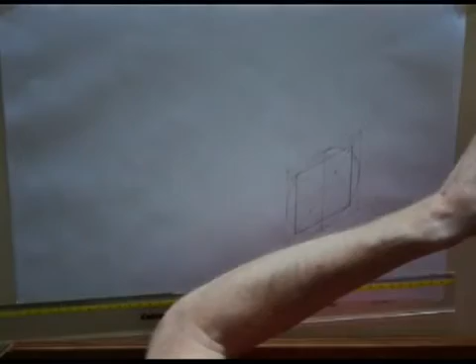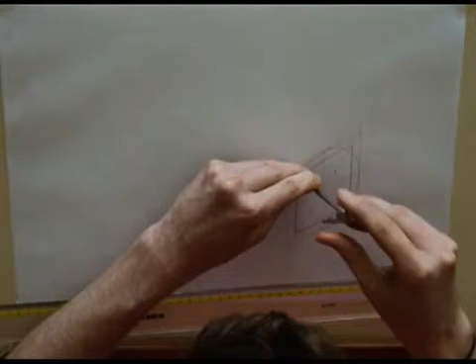So because I don't have to draw new lines now, I'm going to get my compass, place it on the bottom corner of this box here, and take it out to that side, and it matches the top there nicely. And to the top edge of that box. So you can see that my inside circle is starting to take form.

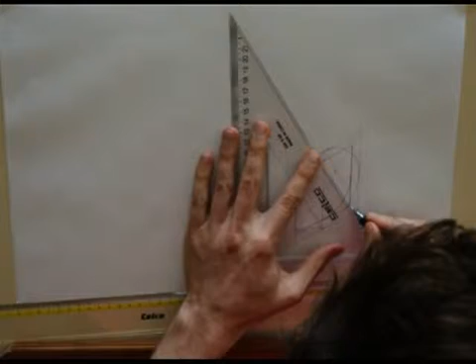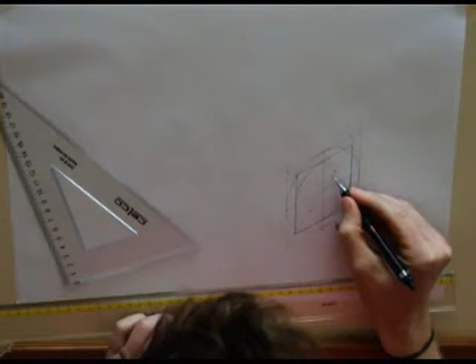Now this is where I do have to start to draw lines again. To find my centre point for the smaller of those arcs, remember we draw a line from the top of the box to the bottom corner. And from the bottom of the box to the top corner. And where those lines cross our longest diagonal line, that's where our centre points are going to be. So there and there.

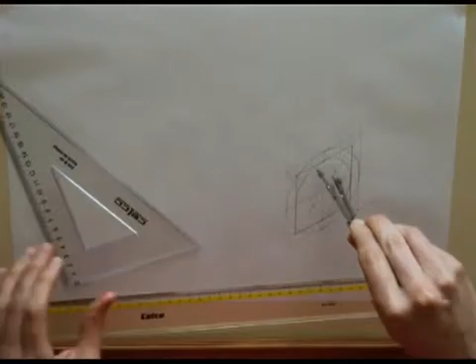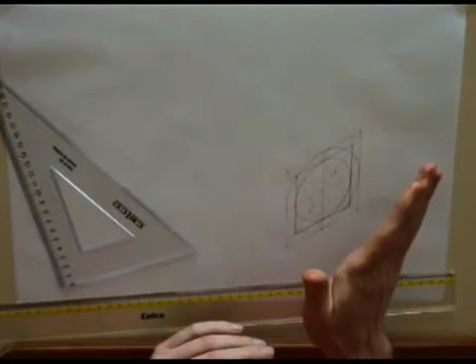Once again, adjusting my compass and checking that it hits both those edge points, which it does. I can scribe in the smaller of the arcs. And the same for this corner as well. Checking. If it doesn't quite match up, move your point around slightly. There you go. So now we have a circle inside a circle. So that's going to be one of the front faces of our cylinder. And the rest of our cylinder is going to come back this way.

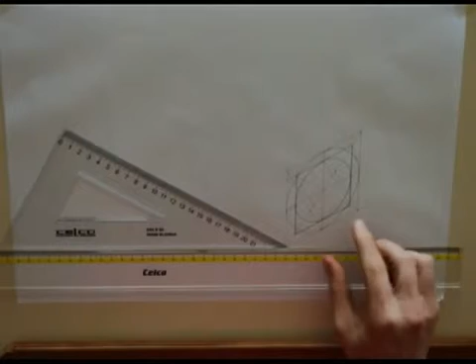So I mentioned crates before. A crate is essentially a box that fits exactly around the shape that you're going to be drawing. And crates are useful for helping us to figure out whereabouts things go on the page. And so our cylinder is going to fit exactly into a crate that's made of the larger of these two squares, these isometric squares that I've drawn here, and extended back as far as that cylinder is going to go.

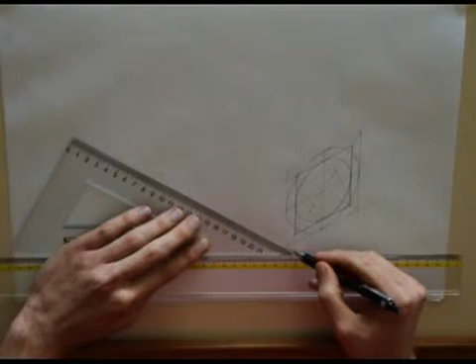So I'm going to make this cylinder 120 millimeters long. So what I first need to do is draw some lines at 30 degrees back from each of the corners of this square. And I'm going to measure 120 for each one and make a small mark.

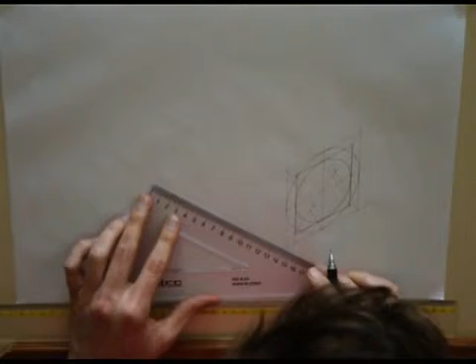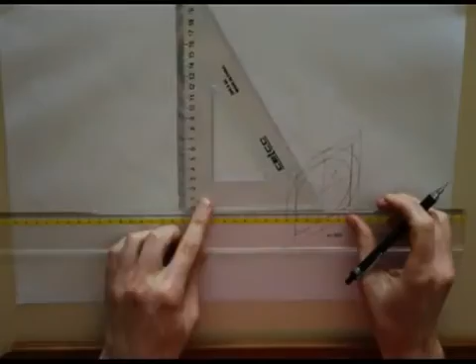And if you've done this accurately, those two marks should be exactly vertical, and those two marks should be at 30 degrees from each other. So let's see how well I've done. Looks pretty good to me. So this crate that I've drawn now, this shape here, this kind of box, that's the box that the cylinder is going to fit inside.

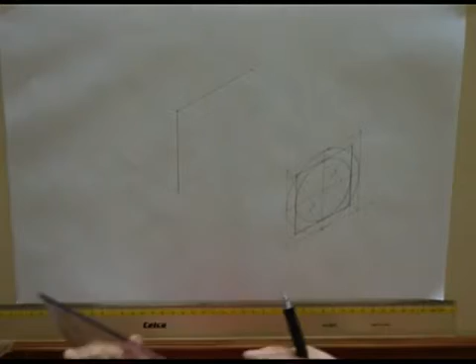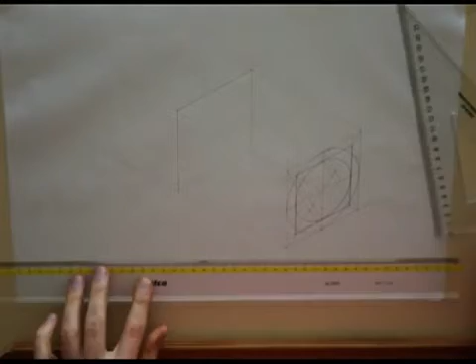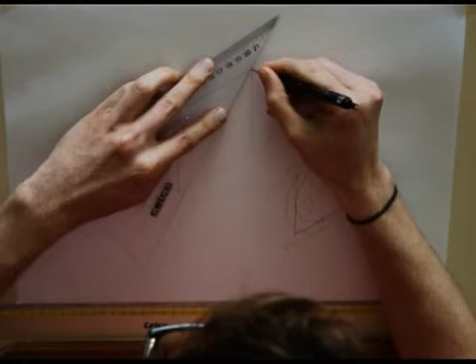So obviously I need to draw a circle for the back edge of the cylinder. And the way that I do that is by turning this back edge into an isometric square. So I can do that just using my 30-60 set square. Draw a line at 30 degrees that way. And draw a vertical line. And the square that I just created here is going to be the square that the circle sits inside. So I'll go through exactly the same process as I did for the front circles to find my points for my arcs.

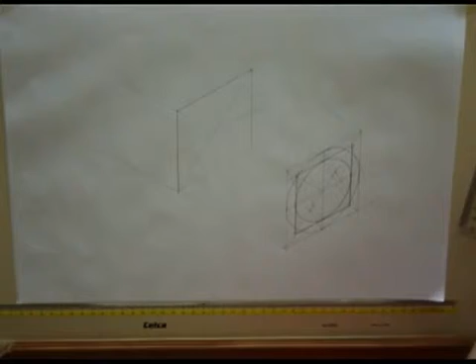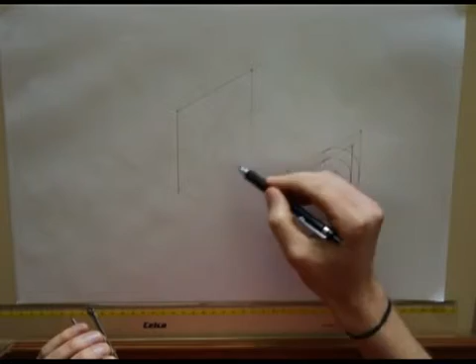Right, now, because this is going to be a solid cylinder, there are going to be some lines on here that we're not going to see. We're not going to see the underside of the curve because it'll be hidden by the rest of the object. So we don't really need to worry about drawing that on. So I can draw this top side of the curve here, but needn't worry about the underside. So I'm just going to draw the top side on with my compass.

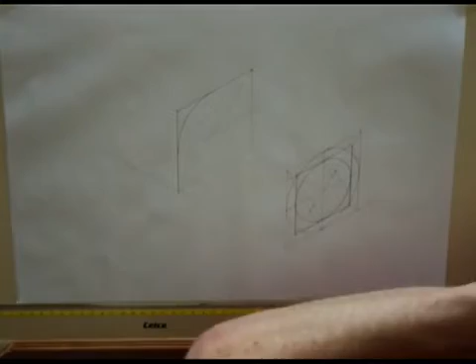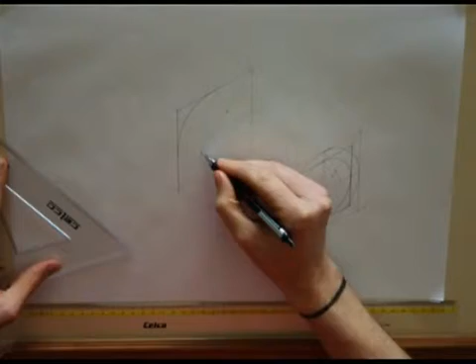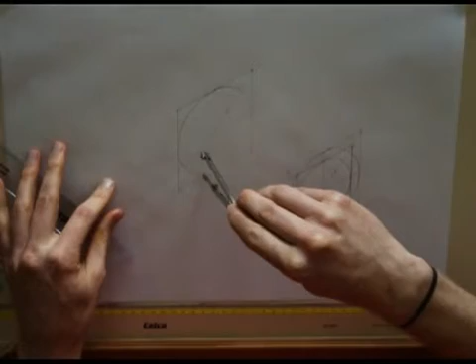And then I'm going to find the center points for my smaller of the arcs. And I can draw the smaller of the arcs in with my compass. Remember, I don't need to go all the way around because some of these lines are going to be hidden. So there's the back curve for my cylinder.

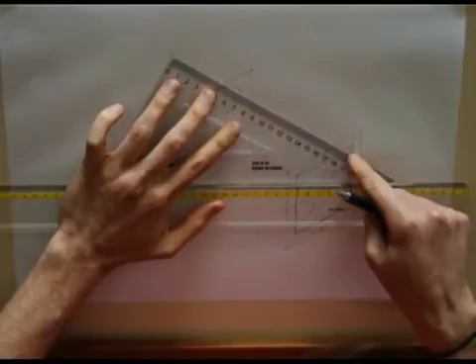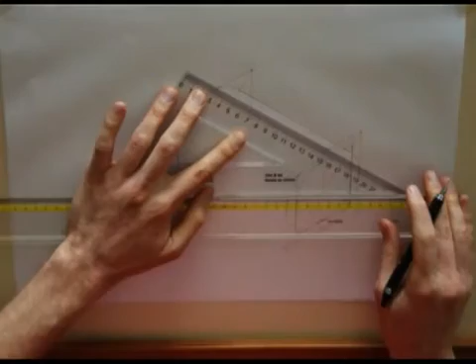Now all I need to do is join the back piece up to the front piece. That's probably the most simple part of the whole process. All we need to do is draw a line at 30 degrees from the top of this circle. And when I say top, I mean the point that's furthest along this line here, and the point that's furthest along this line in that direction. And there you have it, an isometric cylinder.